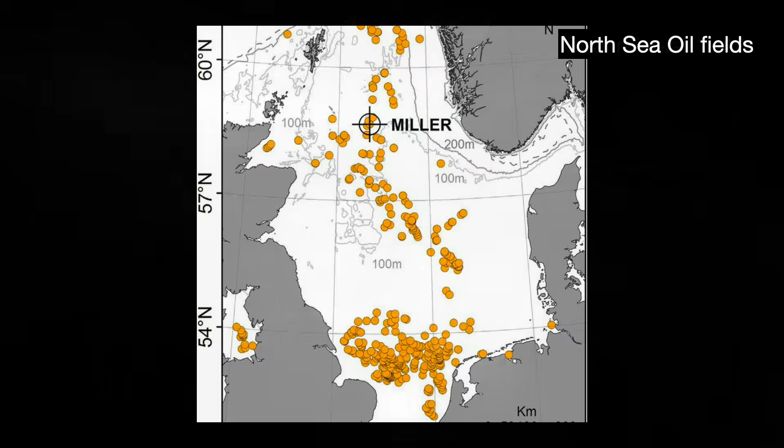In contrast to the horrors of the atom bomb, scientists felt that civilian nuclear energy had the potential to revolutionize Britain's energy industry. In those days, the country's great oil and natural gas fields offshore in the North Sea had yet to be discovered, so Britain was almost entirely dependent on its indigenous coal mines for power and heating. The winters in early 1950s Britain were harsh, but working the coal mines is hard work, and it was getting increasingly difficult to find people to do it.

In 1953, Churchill announced a new public agency to take control of and manage all of the country's nuclear development efforts. A year later, the UK Atomic Energy Authority, or UKAEA, was established. At its creation, the AEA held monopoly control of all nuclear R&D in the United Kingdom, and was also the de facto source for all nuclear information to the political classes. This is in contrast to the United States, in which private entities like General Electric and Westinghouse participated in nuclear R&D.

In order to make a bomb, you need radioactive raw materials. Throughout the late 1940s and early 50s, the United Kingdom set up several plants to produce enriched uranium and plutonium at large scale. These reactors had been built with the military's needs in mind. The stated purpose was to produce military-grade plutonium and other radioactive materials. They can generate power, but with more unfavorable economics and costs.

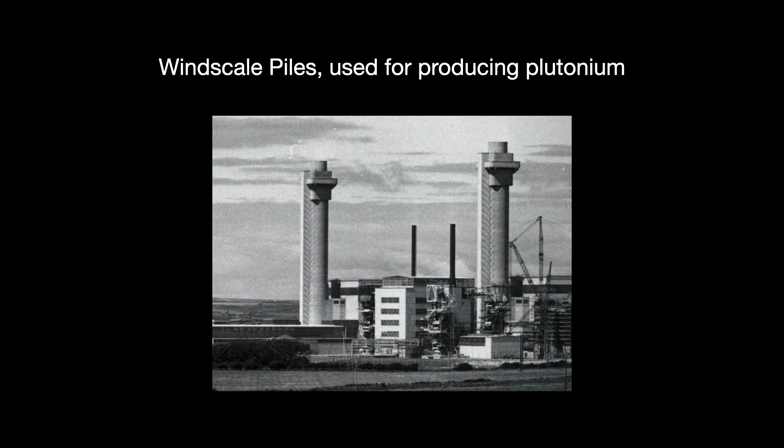In 1954, the AEA drafted a plan to build a series of nuclear power stations generating about 1,700 megawatts by 1965. The designs would be based off a nuclear power station right then still being built at Calder Hall. Queen Elizabeth II eventually commissioned Calder Hall in October 1956, saying, "This new power, which has proved itself to be such a terrifying weapon of destruction, is harnessed for the first time for the common good of our community." At the time, the United Kingdom saw this development as a great British achievement.

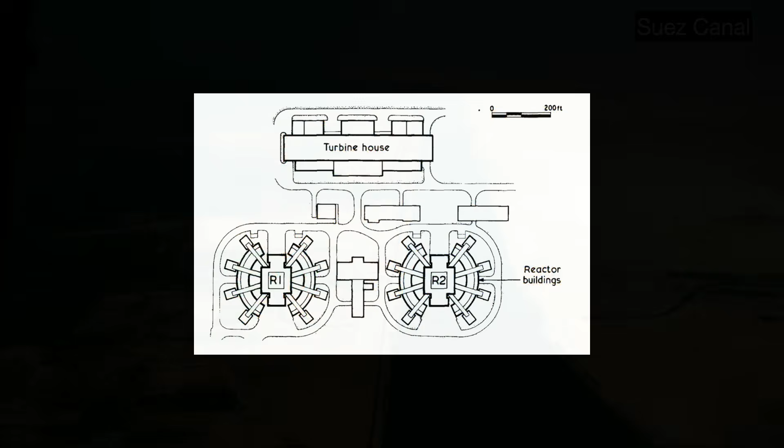That same year, Egypt nationalized the Suez Canal. In late October 1956, the British, French, and Israelis attempted to seize the canal with an invasion, triggering the Suez Canal crisis. The whole thing was a diplomatic blunder and a national humiliation. Best of times, worst of times. The Suez Crisis also cast substantial uncertainty on global oil supplies and whether Britain can get enough of it. Spurred on by public opinion, the incoming Harold Macmillan administration emphasized the need for energy independence.

It was the perfect political environment for the advancement of nuclear power in Britain. Thusly, the UKAEA expanded their nuclear power program up to 5,000 to 6,000 megawatts, or about 19 stations. Considering nuclear's overwhelming political support, the British electricity industry decided not to oppose the plan despite a few concerns about the economics. If all the stations arrived on time in 1965, then they can provide a quarter of the country's energy needs and replace some 18 million tons of burnt coal each year. The whole thing was estimated to cost about 750 million British pounds. These reactors would use a Magnox design, Magnox standing for magnesium non-oxidizing.

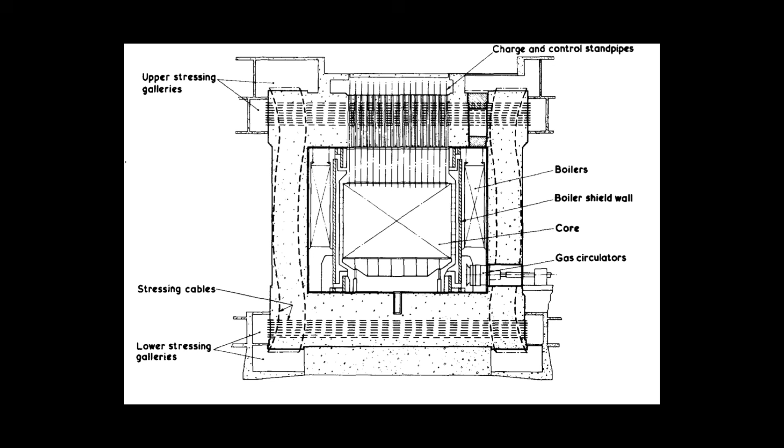Before we move on, I think we should talk a little about the Magnox design. Reactors are largely classified by two factors in their construction: one, the coolant used to carry heat out of the reactor core, and two, the moderator used to control the energy level of the neutrons in the reactor core. At the time, there were 3 types of nuclear reactors out there closest to commercialization: light water reactors, heavy water reactors, and gas graphite reactors. The Magnox was based on Calder Hall's gas-cooled graphite moderated reactor design with a few additional modifications.

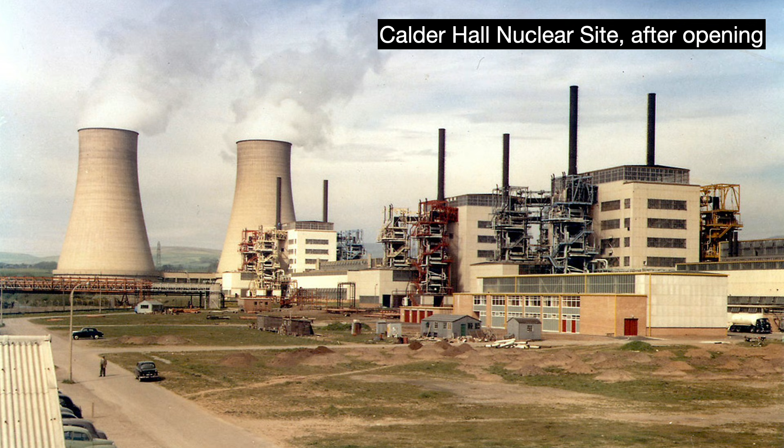Today, we consider it a first-generation reactor. The Manhattan Project used a light water reactor to generate plutonium, but due to corrosion-related safety concerns as well as issues in sourcing enough pure water, the British military opted to build air-cooled graphite reactors. This decision had far-reaching consequences down the line for the British civilian nuclear power industry.

While gas-cooled and heavy water reactors can potentially be safer than light water reactors, the amount of power they output for the space they take up is lower. This is measured in something called thermal efficiency. The higher the thermal efficiency, the hotter the steam going into the turbine is, and thus the more electricity generated for a given fuel cost.

In 1957, the British electricity industry was reorganized, creating the Central Electricity Generating Board, or CEGB. The CEGB would control electricity generation and the national grid in both England and Wales for over 30 years. It was through the CEGB that the British electricity industry first began to push back against the AEA's nuclear rollout.

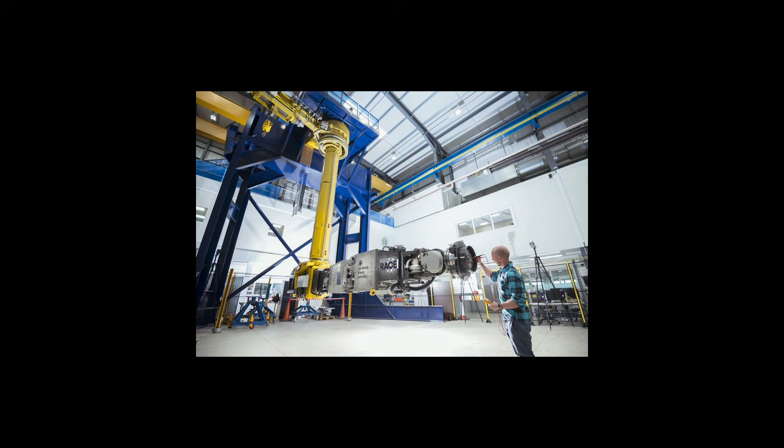In its early years, the AEA had special autonomy and strong political backing, so they had the heft to throw their weight around. But times had changed. The CEGB's senior members began pointing out nuclear's economic uncompetitiveness against other energy sources such as coal.

As it turned out, the Suez Crisis effects on oil prices did not last. New oil fields were discovered, and larger container ships made it economically possible to sail around Africa. It became harder to advocate for spending so much money on nuclear when both coal and oil were getting cheaper.

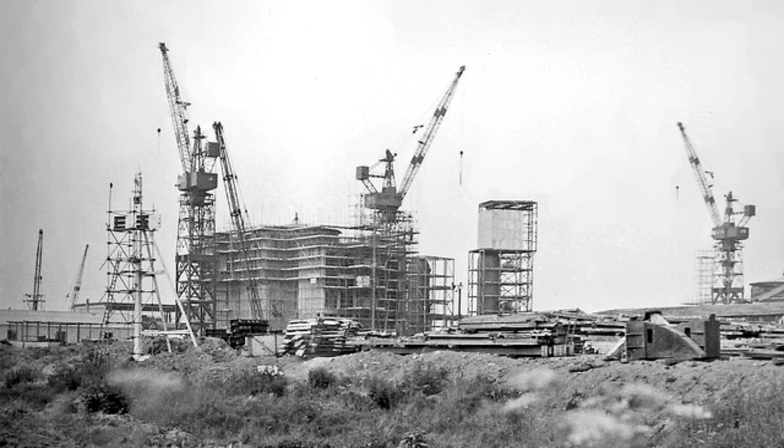Even when using the CEGB's more optimistic estimates, nuclear cost up to 25% more than coal. In areas where coal was cheap, that cost differential went up even higher to 40%. Such pressures from the CEGB and the Treasury eventually forced the government to dial down the Magnox program a bit and push back its deadline a few years.

In total, 26 stations were started up between 1962 and 1971, producing about 4,200 megawatts of power. The UK AEA's post-Suez expansion plan was a bold move, to say the least.

Many of the critical early technical decisions behind the Magnox rollout had been made by a few core individuals without much thought to economic concerns. As a result, Magnox ended up overrunning its early estimates, being about 10 to 20% more expensive and taking 40% longer than planned. This is before taking into account several other significant costs like decommissioning costs, higher interest rates, and R&D costs. The United Kingdom had rushed the plan into action far too quickly.

Calder Hall itself had just started operating less than 6 months earlier, and now they were massively scaling up production of the design. Builders had not fully understood the design before building the next stations.

Furthermore, the UK put together 5 different consortiums to build the power plants. As a result, each power station was essentially a snowflake, lacking in standardization and thus missing out on any potential efficiencies of scale. In contrast, consider the semiconductor industry and the 300mm wafer fab transition. To smooth out construction, the industry got together and standardized virtually every part of the construction down to the wafer carriers, cutting time and expense in the build.

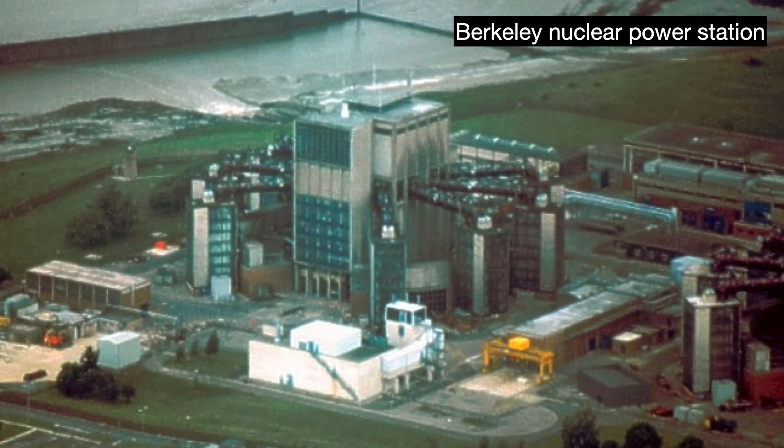This didn't happen here. The design of the Berkeley power station was probably the closest to Calder Hall, but changes were made to add on-load refueling, the ability to refuel while the power station is still operating. But Berkeley, Calder, and its cohorts had thermal efficiencies substantially lower than what was needed to generate enough power, so Sizewell and Bradwell added more boilers and raised the coolant pressure.

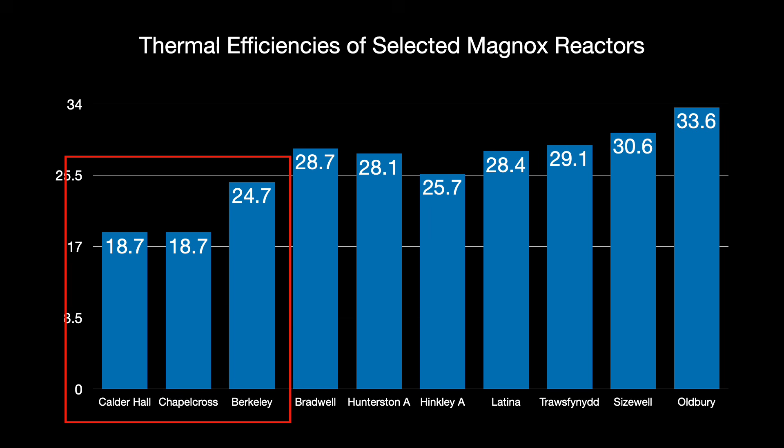Oldbury, for its part, added a concrete pressure vessel as an additional measure against catastrophic failure, but this in turn required substantial re-engineering to insulate the concrete from the high-temperature gas. And so on. You get the point.

At the same time, interest rates started to rise. Nuclear power plant construction takes a long time and is very capital intensive, which makes them extremely sensitive to interest rate movements. The higher rates are, the harder it is to make a required rate of return.

In the late 1950s, they assumed a 6% interest rate, later raised to 10%. This was probably too low. Interest rate estimates over in the United States at the time were about 14%. Capital costs alone added 360 million British pounds to the construction costs of 7 nuclear stations between 1962 and 1966.

The CEGB passed these higher capital and construction costs directly to the consumers. Electricity generation prices for the aforementioned Berkeley and Bradwell plants rose from the original £150 per kilowatt to £167, and that was before construction even started. And lastly, the gas-cooled design originated from the British military.

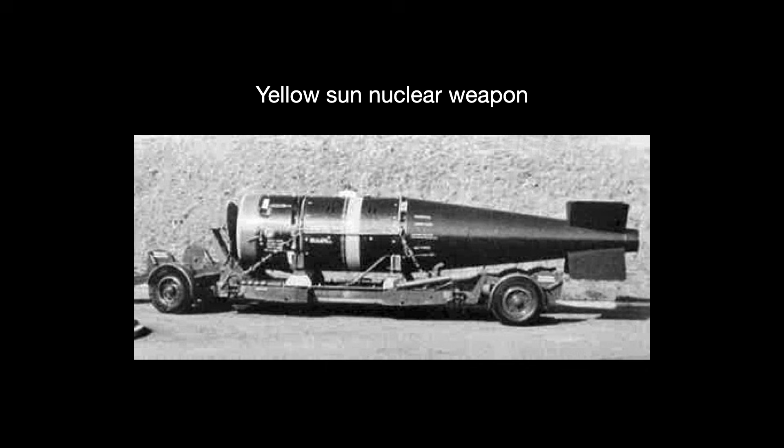As I mentioned, such reactors were better for making plutonium than economically generating power. The UK AEA, for their part, argued that this was a feature, not a bug. At the time, the British military was building up its nuclear arsenal to deter the Soviets, about 50 to 200 atom bombs. These power plants could sell them that plutonium for extra cash.

Back in 1955, this made sense. Plutonium back then cost hundreds of times its weight in gold. But new supplies from Canada and the United States crashed the market, and you cannot exactly sell this stuff abroad. So this tactic didn't work out.

Considering all the stuff that didn't work out, a 10% cost and 40% time overrun isn't all that bad. Overruns happen all the time, including with fossil fuel stations. Most people recognized that the Magnox program had strategic and political goals rather than economic ones. It established the United Kingdom as a nuclear energy pioneer. Furthermore, the actual stations themselves, despite being a little underpowered, performed well and stayed out of trouble throughout their operating lifetimes. So all in all, probably worth it.

As the Magnox program started to wind down, the UK government launched a second-generation nuclear program in April 1964 to replace it. In it, they proposed another 5,000 megawatts of nuclear plants to be constructed from 1970 to 1976. Three consortiums submitted tenders for the first plant in this series, an expansion to a Magnox site, Dungeness B, like the crab, using various reactor designs.

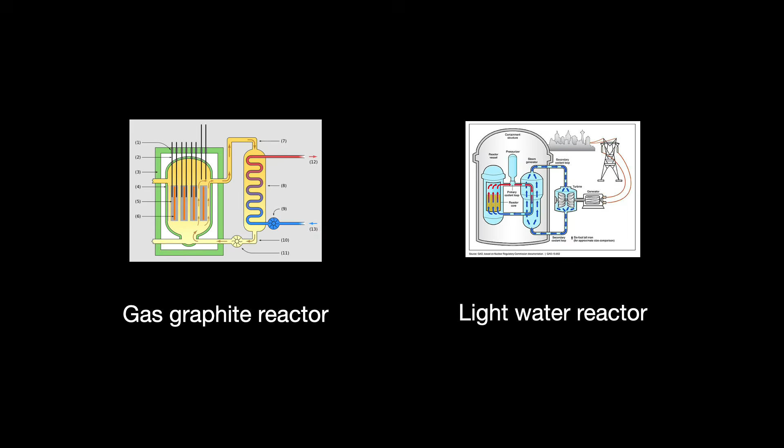The CEGB was given the task of deciding between continuing with the gas-cooled Magnox-style reactor design or adopting an American light water design. The UK AEA advocated for their gas-cooled design. However, at the start, the CEGB seemed skeptical. Their experience with the Magnox gave them concerns that there were serious design limitations.

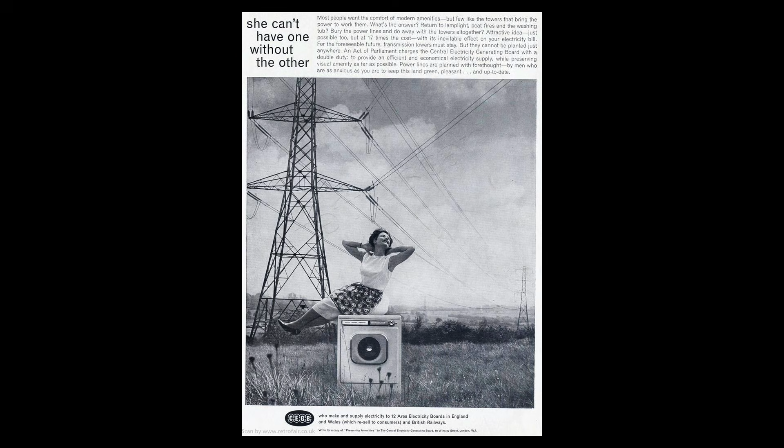The issue was that the UK government wanted to eventually export their British native reactor designs abroad, but the international community was increasingly coalescing around American-style water-cooled designs. Why should foreign countries adopt the AEA's designs if the country's own domestic power industry won't? And for additional background, the new Labour government was reeling from the British military recently cancelling the British TSR-2 advanced aircraft and instead adopting an American F-111.

So while the CEGB was supposed to have autonomy in choosing which reactor to use, the UK government certainly had its own preference. Then, at the end of 1964, the CEGB director, Sir Christopher Hinton, retired. He was known to be a nuclear power skeptic, and after his retirement, CEGB's attitude towards the gas-cooled reactors noticeably shifted. Like I mentioned, 3 consortiums eventually submitted tenders for Dungeness B.

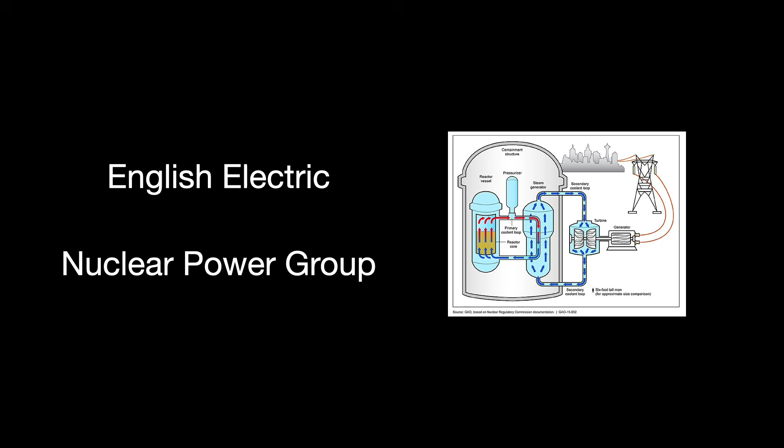The first 2, English Electric and Nuclear Power Group, preferred American water-cooled designs. These 2 were backed by solid companies. But during the pricing evaluation stage of the tender selection process, the UK AEA engaged a third consortium for technical consulting, Atomic Power Constructions.

Atomic Power was experiencing financial difficulties after losing a tender for the last Magnox station, basically near bankrupt. During this technical consultation job, Atomic Power briefly evaluated the possibility of doubling the rods from the original gas-cooled design. In an apparent Hail Mary, they threw in a last-minute tender based on this possibility. The CEGB decided to choose this third tender, which surprised some people. To back their decision, UKAEA and CEGB explained that under British conditions, the gas-cooled Dungeness plant would produce energy for 7% less than competing American water-cooled designs.

And so in May 1965 came the official recommendation to move forward with the Advanced Gas-Cooled Reactor, or AGR. The other consortiums would have to build AGRs too. Minister for Power Fred Lee told the House of Commons, 'I am quite sure we have won the jackpot. Here we have the greatest breakthrough of all time.'

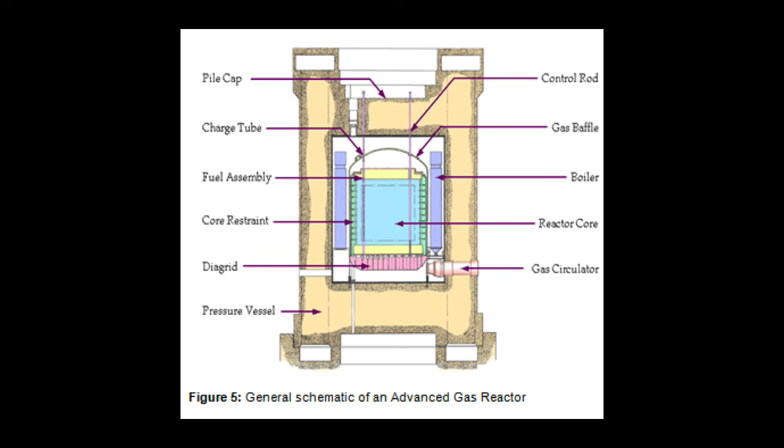As it turns out, the AGR was flatly the wrong choice. The models told rosy stories based on unrealistic assumptions. Atomic Power had stretched beyond what it was capable of doing in an effort to secure the tender. The consortium collapsed in 1969, leaving the aforementioned English Electric to pick up the pieces.

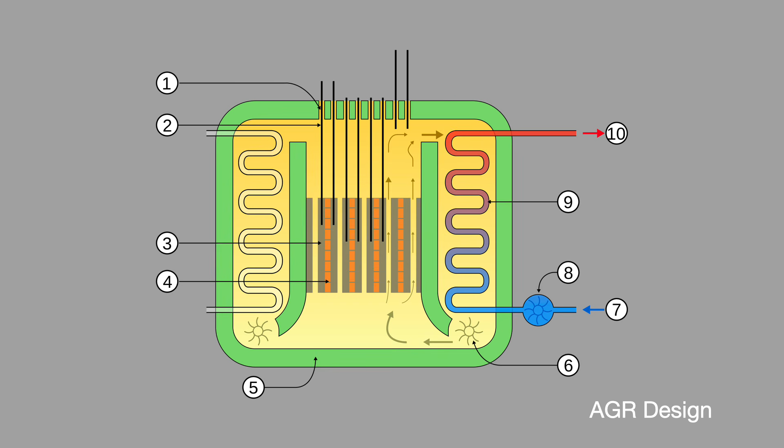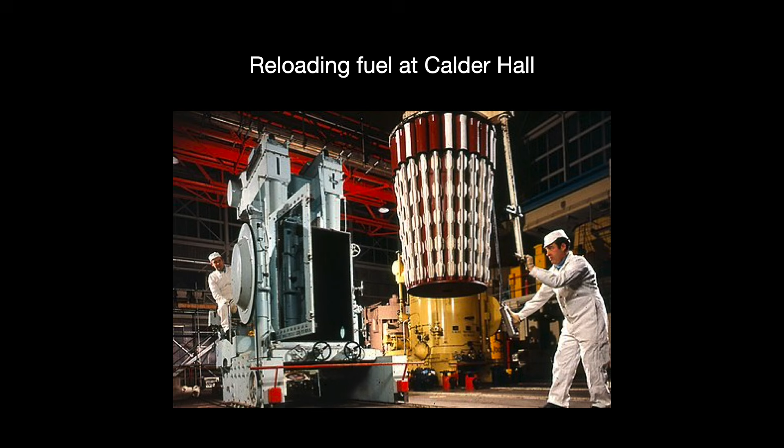The UKAEA and CEGB did not immediately release the work behind their 7% cheaper argument. As it turns out, the key term in what they said was British conditions, two essential financial model assumptions. The first faulty assumption was again the capital costs. They were once more way too low compared to contemporary American projects, despite using a less proven design. The second assumption was that the AGR would be able to run for more days than the American designs because they don't have to turn off for refueling, on-load refueling, which I mentioned earlier. This assumption was faulty because they had not actually tried to do on-load refueling on a fully sized AGR.

It had worked on a little prototype with a capacity of 33 megawatts, but that was multiple times smaller than the proposed build-out. When they first tried it on a fully sized AGR, the reactor started vibrating so much that 3 fuel elements broke into pieces.

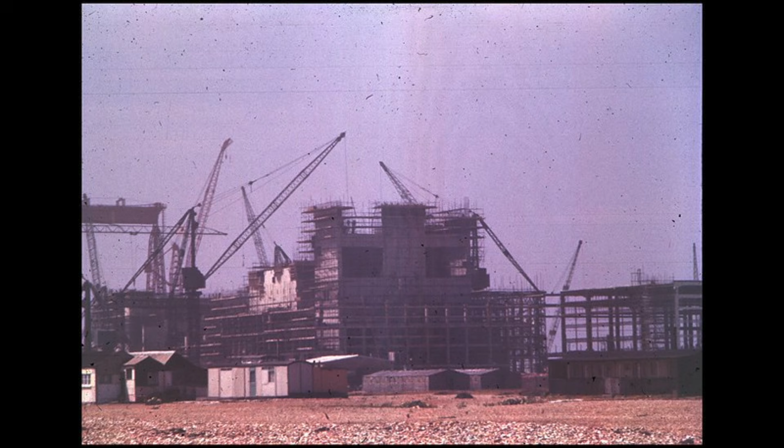It would take over 20 years to fully achieve this. By 1967, less than 2 years after approval, people started to realize that the AGR design was not ready. The engineering challenges ahead were found to be immense.

The reason why the AGR was supposed to perform better than its Magnox predecessor was that it operated at higher temperatures, which in turn means a higher thermal efficiency, at about 40%. However, engineers discovered that the higher temperatures corroded the previously used magnesium cladding around the fuel.

Over 10 million pounds were spent testing for alternatives. First, beryllium, which was discarded because carbon dioxide corrodes it, and then stainless steel. Steel required further engineering work because of its nuclear properties, but that was deemed an unavoidable cost.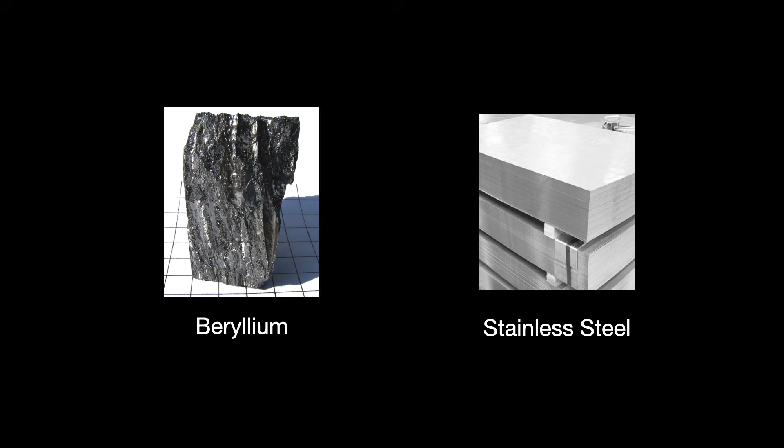Another serious issue had to do with the use of graphite to moderate the nuclear reactor. At high enough temperatures and radiation loads, the graphite cracks, which is a big problem. To keep the graphite relatively cool, a new coolant circulation system had to be devised.

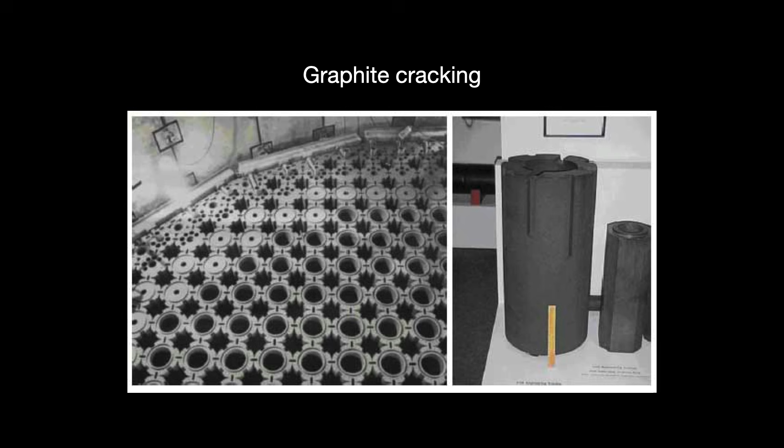Engineering difficulties at Dungeness B continued. The first reactor finally started generating power in 1983, 18 years after work started. The power station did not reach full capacity until 2004, 38 years after start.

The Dungeness B debacle would stand as a lasting symbol of the UK's struggling nuclear industry. The other AGR stations, a total of 7, were built from 1979 to 1986, went up with far less troubles, but still suffered cost and time overruns.

An estimate published in 1977 by economist P.D. Henderson found that the AGR debacle cost the country about £2.1 billion in 1975 currency. Today, that would translate to about £20 billion. And remember, this was published in 1977.

Dungeness B had another 6 years to go before generating electricity. The costs were to go even higher than that. At the heart of all these manufacturing issues, labor unrest, and construction delays was the fact that the AGR design at its outset was fundamentally flawed.

This round of power station construction left the country with a bunch of economically uncompetitive stations. The discovery of massive oil and gas fields off the North Sea presented new economic challenges to nuclear, but the nuclear industry's most formidable challenger was coal.

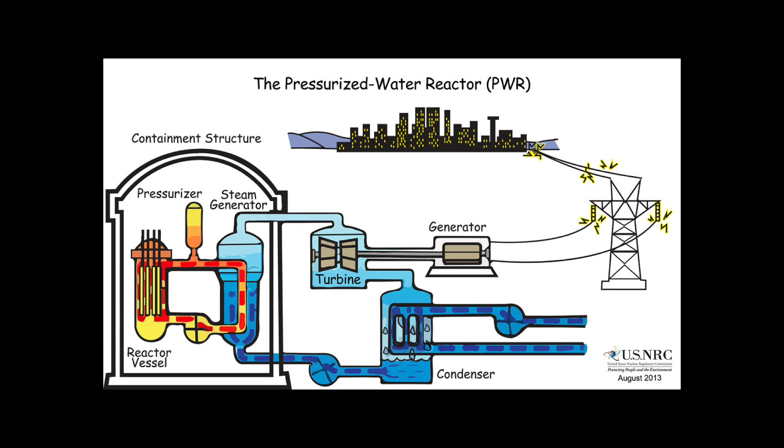By now, the British public endured years of delays and broken promises. It is not surprising that they started to lose their faith and optimism in their nuclear energy industry. Something had gone wrong somewhere.

In 1979, Margaret Thatcher and her Conservative government came to power. Personally, she supported nuclear energy. She liked that it didn't emit greenhouse gases and that it provided a hedge against the coal industry. Also, as a scientist, she personally admired the technology behind it. So it is a little ironic that her policies would have such lasting effects on the country's nuclear industry.

As energy security concerns faded going into the 1980s, her government sought to reduce its involvement in energy policy. At the start, her administration believed that nuclear generated electricity more cheaply than any other method out there, something her officials have said more than a few times. So it would have no problem with this new market liberalization, right?

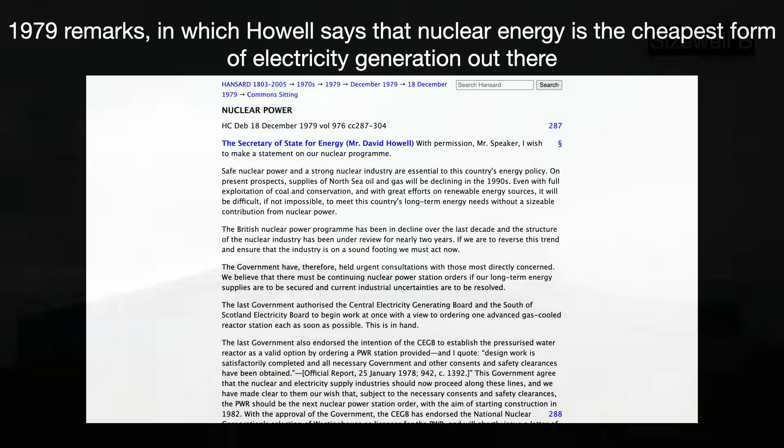In the early 1980s, the government announced new build plans for a series of pressurized water reactors, carrying on the technical decision made by the previous Labour government. The first of these stations, Sizewell B, was started, with 3 more after it. Thatcher won office in 1979, promising only to privatize state enterprises like British Steel.

The 1980s saw massive changes to the market environment. Oil prices had greatly fallen from their peaks in the 1970s. The government had broken the back of the coal workers, and the United Kingdom had started to use gas-fired power stations. Considering the market competition, the Sizewell B nuclear power plant would never have passed an investment review at British Gas or British Coal even before those 2 companies were privatized.

Worse yet, the 9 first-generation Magnox reactors were nearing the end of their operating life. With that would come immense decommissioning and waste disposal costs, about £600 million for each Magnox. Analysts argued that the nuclear power stations had to remain under public control. As the government began breaking up the venerable CEGB, it realized the same thing: no private shareholder would take on these liabilities.

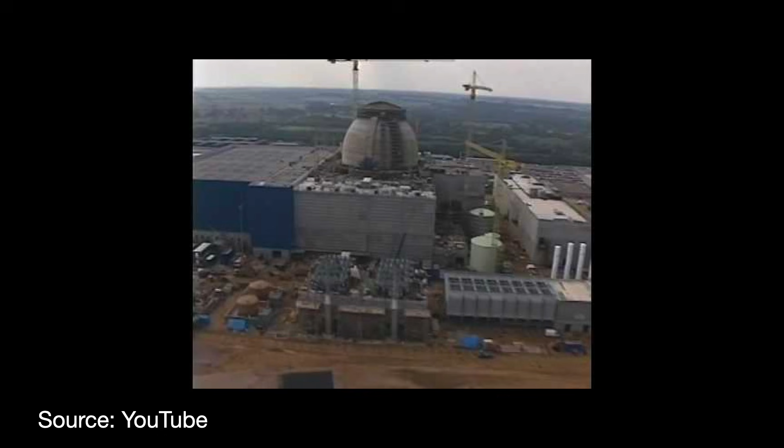Work on Sizewell B continued. Halting it would have been a loss of face for Thatcher, but the 3 other water-cooled reactors on the plan were taken off. Thatcher wanted them, believing that nuclear was a critical tool in the fight against global warming, but the Treasury refused to go along.

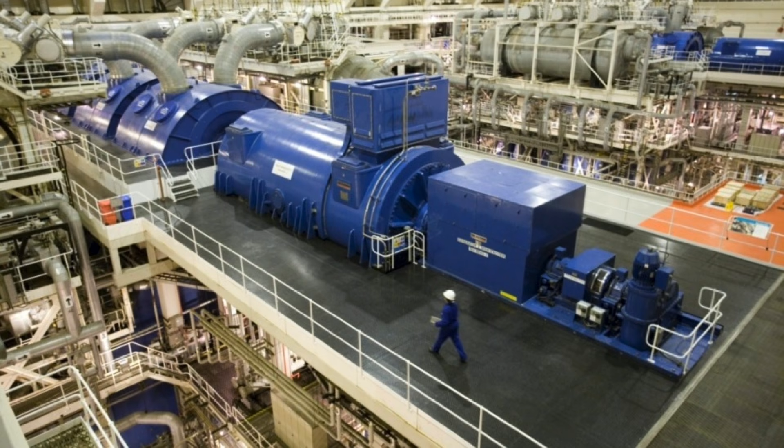The withdrawal from privatization was a national humiliation for the British nuclear industry, an admission that decades of favorable cost estimates and statements by various energy officials was false. But the night is darkest just before the dawn.

Over the next few years, the 2 companies improved their AGR reactors and successfully introduced new management practices. The 2 companies also shut down their oldest reactors, negotiating fixed prices with the government-owned company British Nuclear Fuels Limited for the cost of disposal. This removed a lot of uncertainty about the company's future liabilities. The industry's reputation and financial performance improved.

By 1995, Scottish Nuclear turned a £182 million operating profit. Nuclear Electric had an operating loss of £33 million, but that was due to a one-off pension cost. Thusly, in 1996, the government finally privatized the two companies, combining 7 of their newer AGR nuclear power stations into a single company, British Energy. The Magnoxes would be hived off into another company for future decommissioning.

However, it was not a complete victory. Scottish Nuclear and Nuclear Electric had hoped that it would be able to complete some of the other water-cooled plants to come after Sizewell B. But the UK government made it clear that it would not support and subsidize such a decision. This essentially marks the end of the indigenous nuclear power industry in the United Kingdom.

In part due to bad financial management and rough market conditions, British Energy later suffered financial troubles in 2002 and required a £650 million bailout by the British government. It was later acquired by a French power company and renamed to EDF Energy.

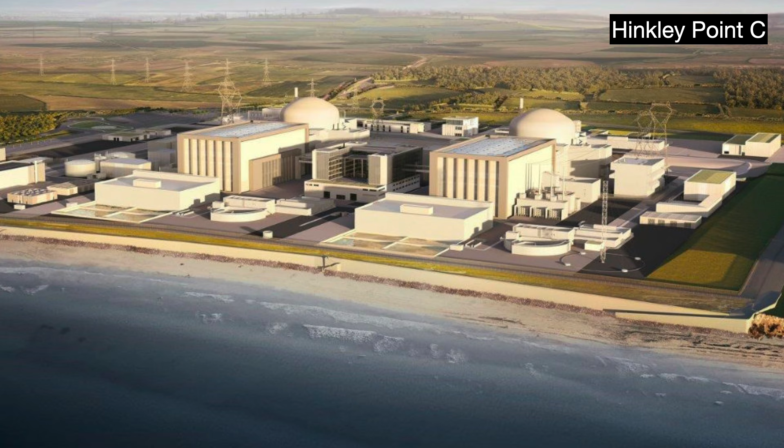In 2010, the government announced a series of new third-generation nuclear power stations. The Chinese state-owned enterprise China General Nuclear Power Group is contributing funding and technology. These reactors will use a third-generation EPR design used for the Taishan nuclear power plant in Guangdong. The first of these stations, Hinkley Point C, is slated to be completed in 2027, at a total cost of £25 billion, 50% higher than the original 2016 budget.

Despite that, good for them. Nuclear should have its place in the energy portfolio. But part of the reason why the United Kingdom's nuclear energy industry collapsed in the first place was its structural inability to compete with gas-fired and coal plants on the open market. Hopefully, new policies and technologies can be introduced to ameliorate this.